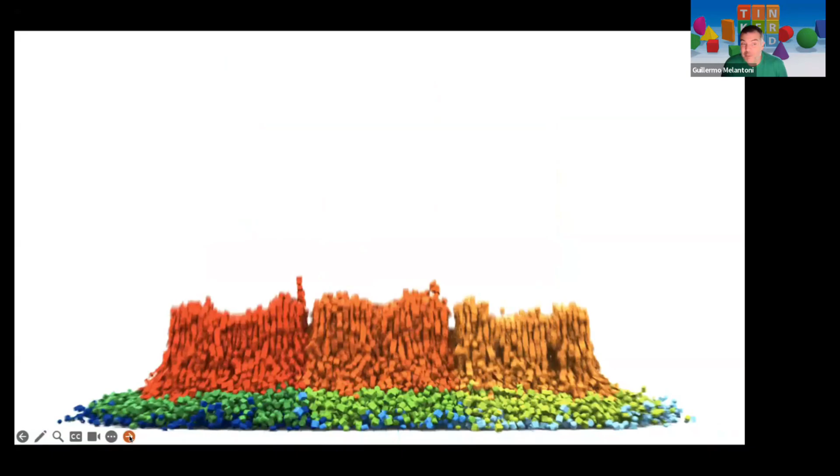Welcome everybody, I've seen people from many countries, so it's great to see a lot of people from all over the world, and actually some people for whom it's really late. For example, somebody from Czech Republic, I tend to count 9 hours over where we have right now here. It's pretty early for them. So yeah, let's go into the next slide.

I just wanted to make sure, because we have people from all over the world, and also experts and maybe people that had just started on Tinkercad, given the fact that we have almost hundreds of thousands of new users every week during back to school. That means that somebody's just started at some point, right? So it's good to make sure that y'all understand sort of how we frame Tinkercad as this great, super fun, but really powerful solution we have for designing, for 3D design, for electronics design, for simulation, that can be used by any ages.

But as Kellyanne was saying, kind of our sweet spot somehow lies in the same place where the distribution landed today here, which is somewhere in elementary school, middle school, beginning of high school, and then usage all over the place into post-secondary and more. That's the spot that I also mark there, which is kind of fun — we're kind of in agreement on where we think we are. The other thing is that at the beginning, you might be using Tinkercad just as a generalist tool for anybody to start getting creative.

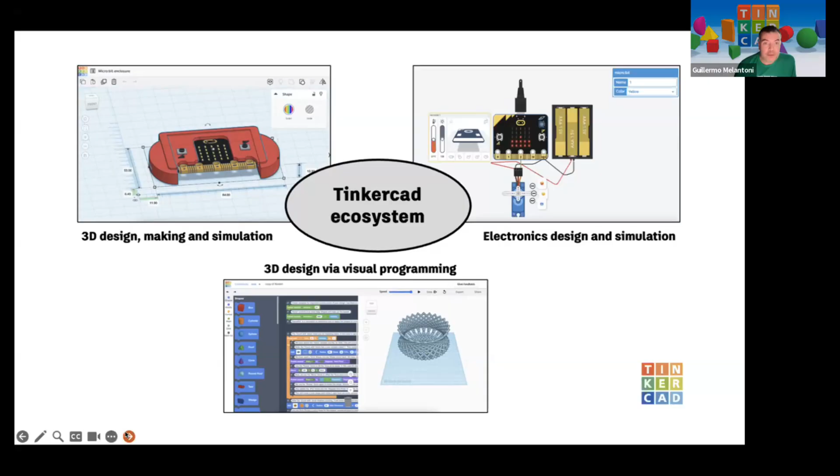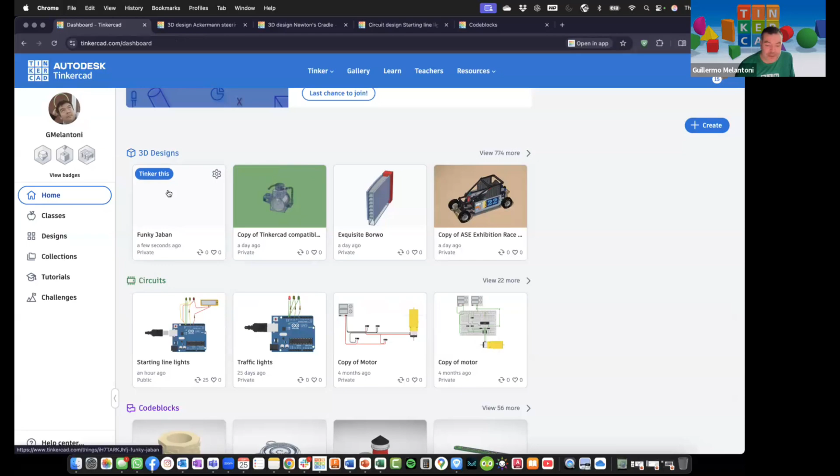Okay, so this is my Tinkercad screen, and before that I'll just go back to my dashboard. So you know, for example, if I start at home, we have our lovely faces up there, and then we have 3D design, circuits, and code blocks on 3 swim lanes, in which you have all the designs you've made. If you have done nothing yet, you will get access to some tutorials to get you started, because nothingness is horrifying, so we want to show you something there. But in this case, I've already created a design, or at least started with a design.

And yeah, you have a bunch of objects on the side, and it's almost natural to see what happens when you drag and drop. So dragging and dropping will get you, in this case, a box on the scene. What can I do with the box? I already have some hints on those little things I have on the box.

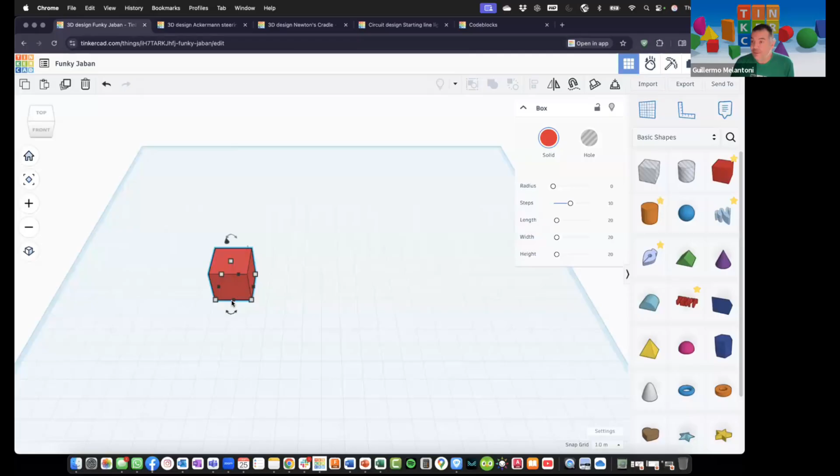Now, if your kids have ever used Google Slides or PowerPoint or done anything with an image, if you go to a top view and make it flat, that looks a lot like a rectangle you put on Google Slides. These controls look a lot like what you would do there, which is push this control to make the thing bigger, and that's a scale. If you press shift, just like on those applications, you get a uniform scale. And if not with shift, it's a non-uniform scale, so you can start getting some language into those heads. Same on the sides, right?

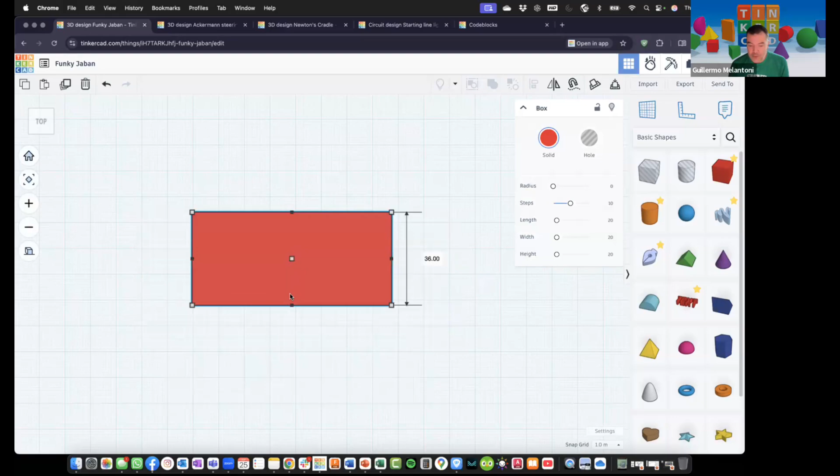You can make things longer with shifts also in both directions. And here's the expert trick that also works in PowerPoint and Google Slides: if you click Option while you do Shift, it's resized from the center. So if you didn't know that for Google Slides and PowerPoint, it's amazing too.

The only thing missing for controlling things is, of course, one that makes things taller or shorter, and one that takes things up and down, because in the lack of 3D on the other spaces there's no need for those, but we try to make them as simple as possible.

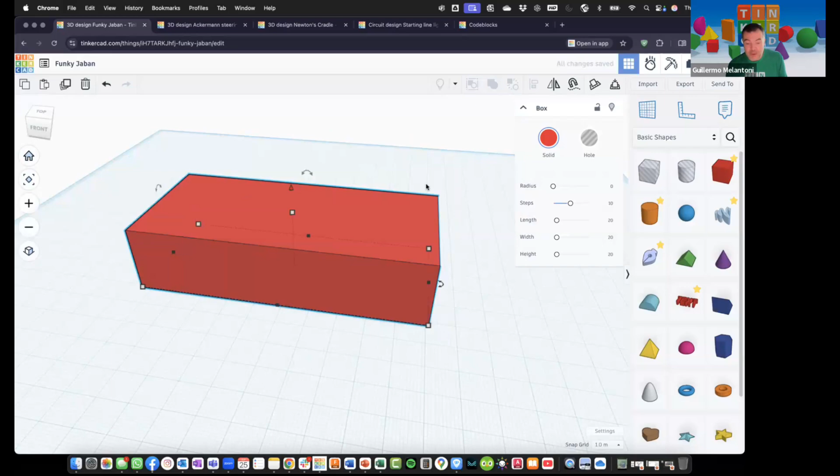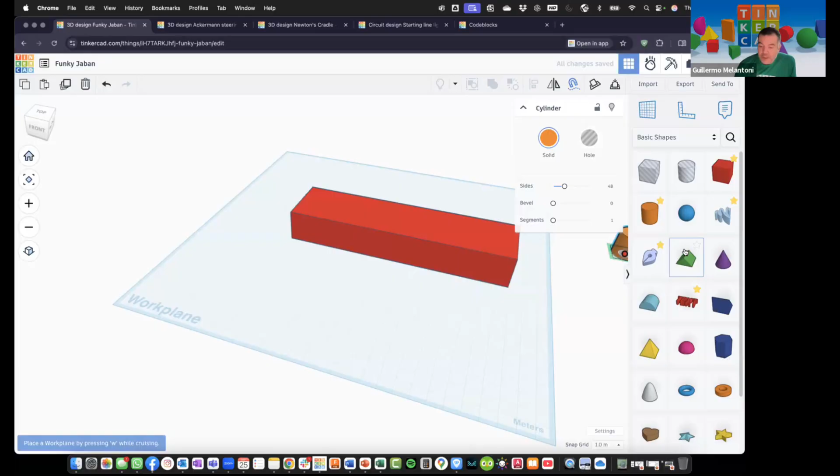Let's say we have this element down here. I'm going to bring a little cylinder, make this a little taller just for a second. One thing we noticed when working with kids is that when you bring something from the side, it will try to follow the faces - we call this cruising.

This is very important because in the past, like probably two years ago, before we had cruising, if somebody just put a shape here, they might think this cylinder is on top of this box. But of course a simple orbit will tell you it's not. It is hard to understand depth for certain ages, so we have to help them understand how to work with those concepts.

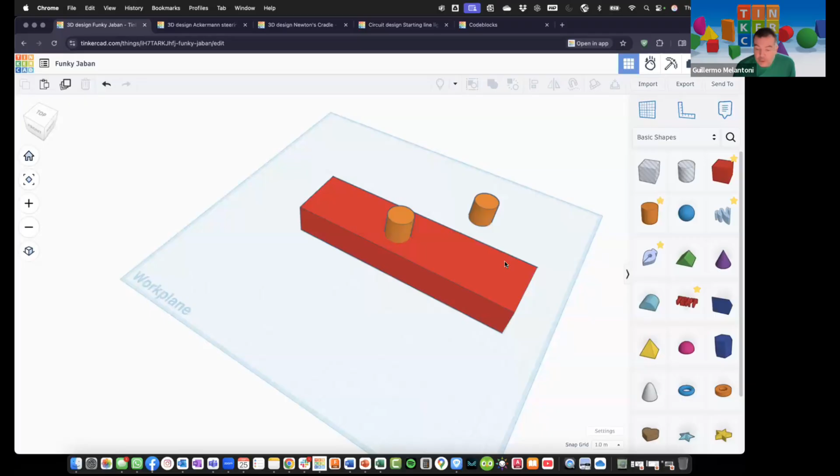So let's keep going. I now have my base with a tall cylinder. I'm just going to copy the cylinder - this is not a Tinkercad lesson, by the way, but I use Option here on a Mac to do it.

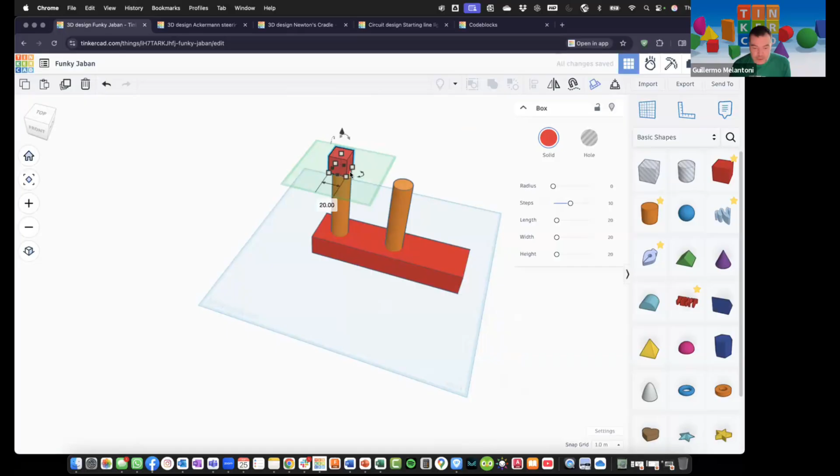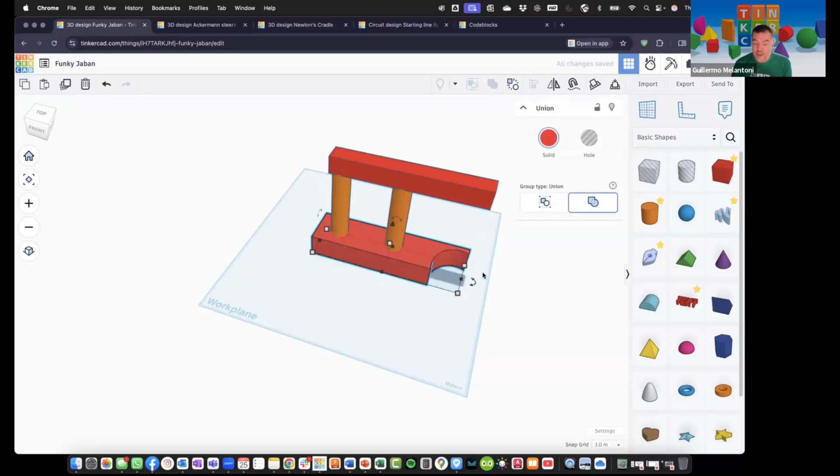Now I'll bring another object to the top, let's see what I can do with this. If I bring another cylinder and make it a little bigger, I don't care that much about how I did it here, but I'm going to make this a hole. If I group - making the choice that the box and cylinder go together and the cylinder is a hole - when I make a group, this thing becomes void right here.

Good to know. Then Christian's going to talk about something new that changes the game a little bit, makes it better and faster, but I'm not going to steal his thunder right now - that's bundles.

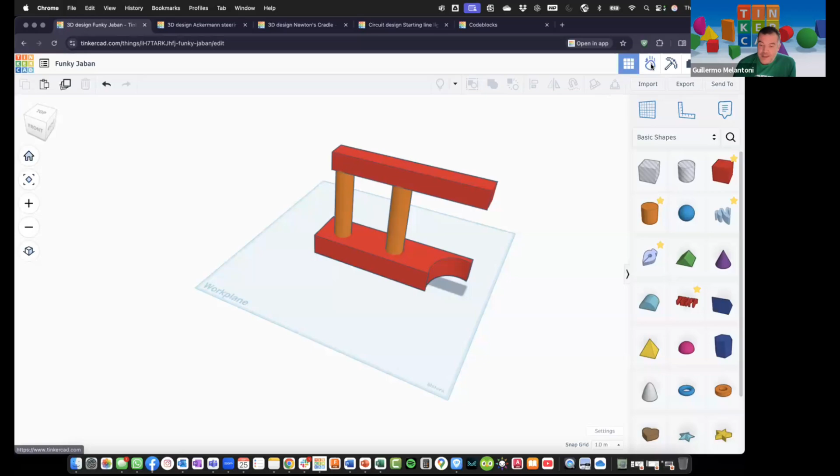So I have this, but now imagine I want to know what happens if I have some gravity on top of this. Funny enough, the button for editing something on Zoom is right on top of the play button, so I need to move this a little bit.

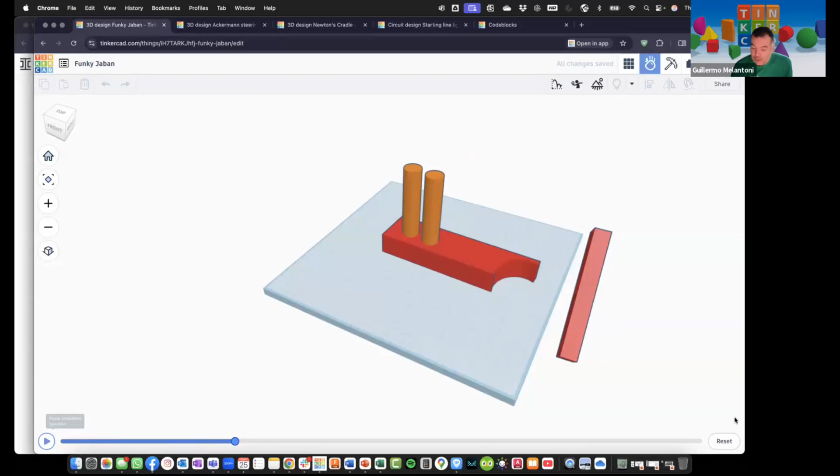And if I hit play, nothing really happens. Why? Because this system is already fairly good in terms of stability. But if I just put this thing here and go back, the whole thing falls down.

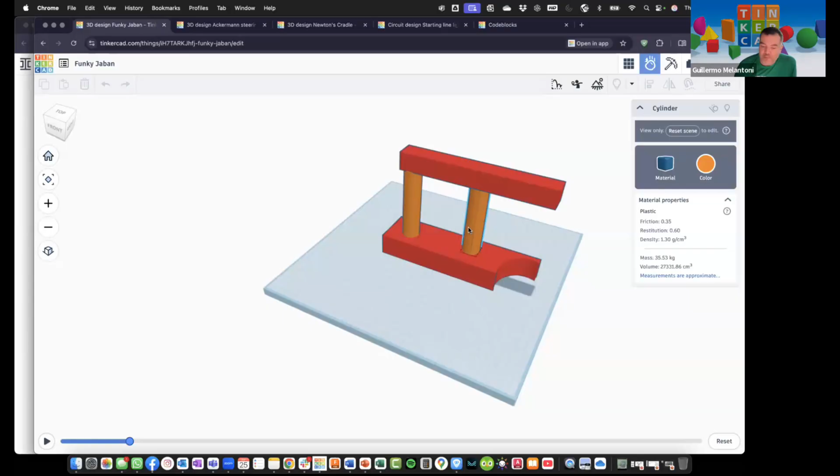First of all, it's really fun for kids to see things falling down - that's the first thing we learned. Second, this is a great teaching moment because you can start letting them understand at which point you need to move this thing for the structure not to fall. Eventually, if your kids are the right age, you might start talking about work - what happens between distance and force, and why this thing is not falling, and how far can it be to not fall. So there's a lot of things you can do there.

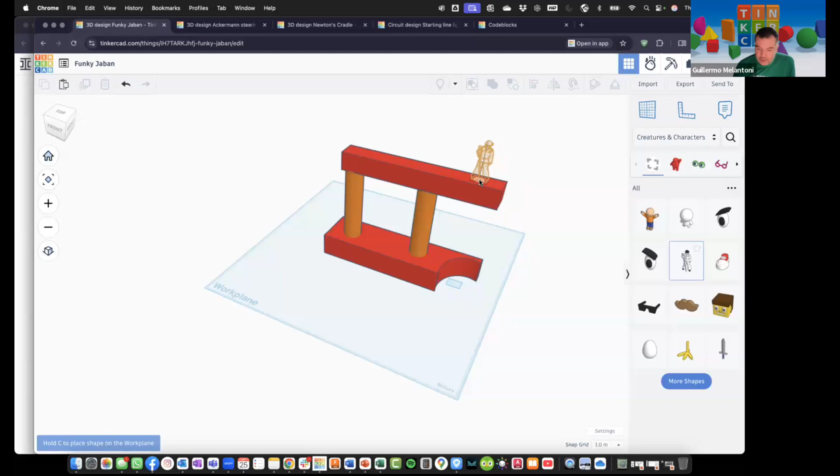But let's make it a little more fun for a second. Beyond basic shapes, we also have other things - we have some creatures here, and my favorite, which is Elvis. So we're gonna put Elvis on top here, and go back to SimLab - the environment I was just using, which is not the one you normally start with, so some of you might not have ever used it. It's kind of wobbly, but still Elvis is there.

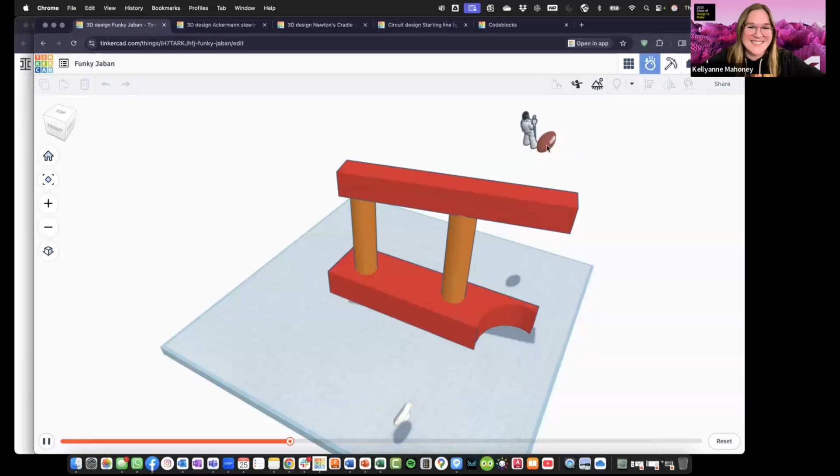You know what, we can just drop Elvis if we are really good at this - oh come on, let me try again. Okay, so Elvis has left the building. So there's a lot of things happening here, and the most important thing is that kids can have a lot of fun and be learning at the same time.

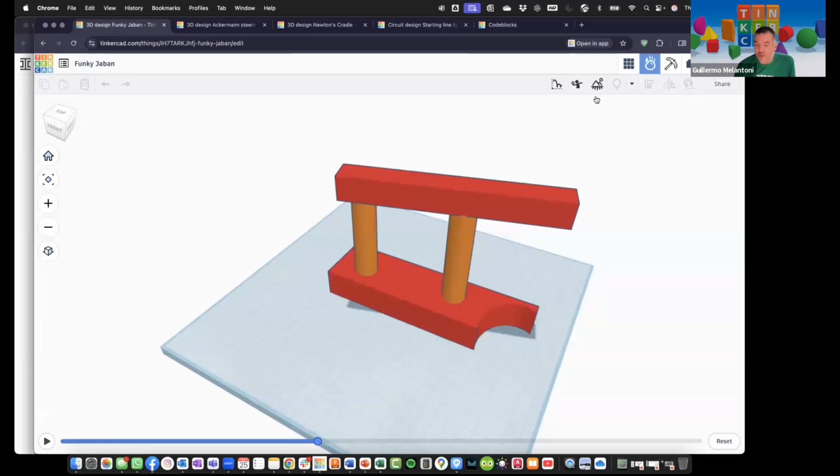And when learning becomes fun, learning is easier, right? Learning doesn't have to be difficult. Here we're talking about deep concepts of physics that if you just tell them, open the physics book to page 349, you lose half of them. Doing something like this could be more interesting, and it could be even more interesting if we start adding gravity and stuff like that.

Guillermo, sorry to interrupt. There's a request that you speak a little louder, some people are having trouble hearing you. Oh, I am never asked to speak louder, I was surprised by that. Use your teacher voice. I was expecting to be told to speak slower. Anyway, is that loud enough? Awesome, great. Hopefully you still understood what I was saying, because it was probably really fun.

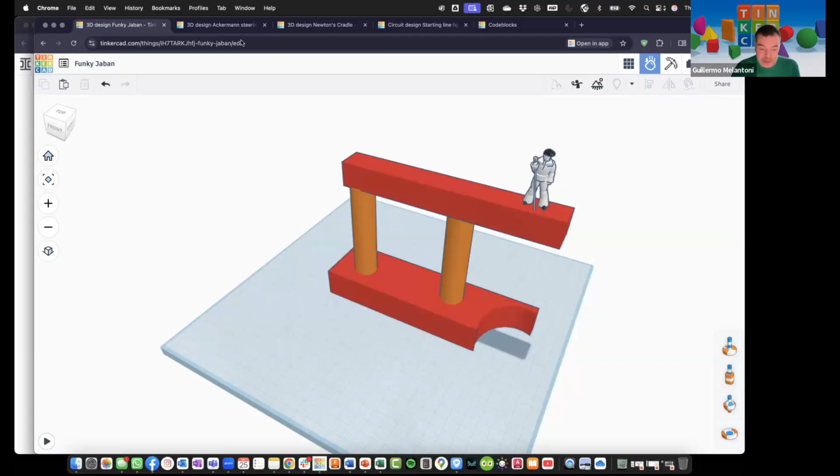Let me keep going into a couple more things I would like to do, because in Tinkercad at any point you can export to OBJs or STLs. OBJs when you have color on the objects, STL if you just want to make a 3D print. Mostly everybody uses STL unless you need color, but we have those options. GLTF serves other purposes. We also have workflows with other tools in Autodesk like Fusion or Forma that we'll cover more in other webinars, mostly the second one, that help you not start from scratch on those applications.

In this particular case, I'm just going to switch to other things you can do on Tinkercad. Again, a little more advanced, just a nod to some of you that might already know Tinkercad pretty well and are probably getting bored if I keep talking about basic things. But for example, this particular example, right?

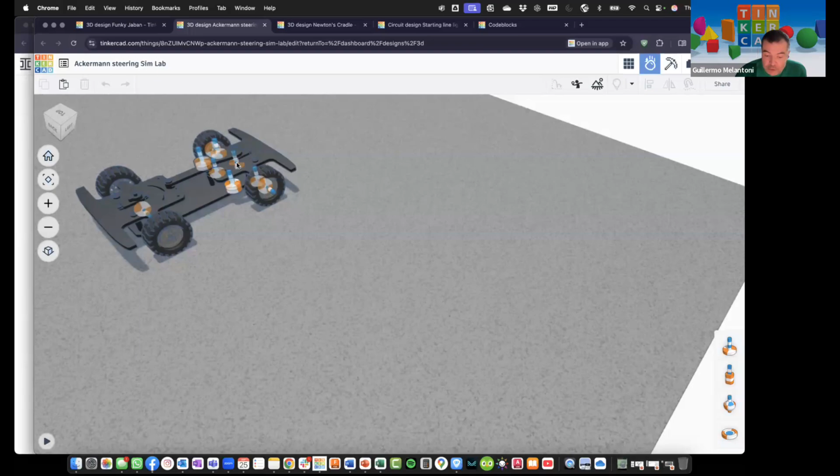So not only on SimLab can we do gravity, but also we have motors. Each of these connectors, which is what we call them, defines a relationship between objects. Could be an axis, could be a slider, could be a pivot. In this particular case, you can define the type of motor and also some of the values, which is going to be starting speed and torque and everything. Again, a lot of things you can start talking about in your classroom.

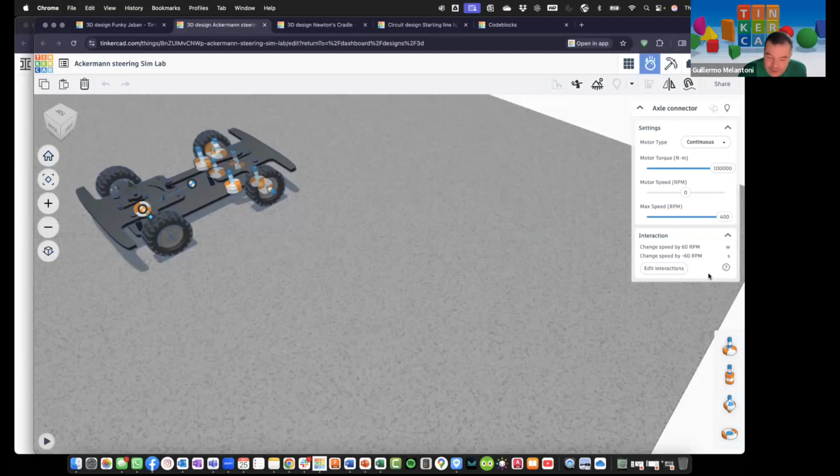It also has interactions. So for example, in this case, A and D will move the wheels because that's what this one is doing, and I'll show you what happens. And then there's another here that will move front and back, so this has rear traction. But when I hit play, not only do I have the object, I can also make it go, just turn. So there you go, right? I just wanted to see if I could, let's make it fall, because there's nothing more interesting than just free fall.

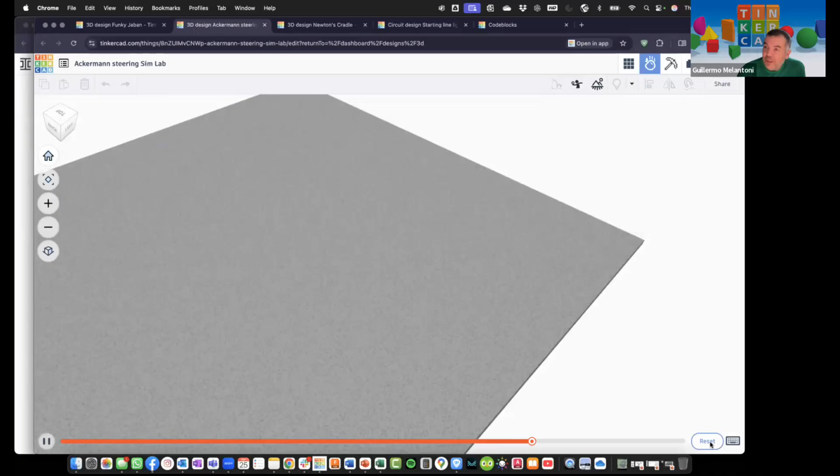There you go. You need to be also young, as your kids, young in mind and immature like them, and laugh about those things. There's a lot to unpack on those things, and we're not going to be talking too much about that today, but definitely there's a lot of really good information on our Tinkercad blog, which is a resource you should be looking at, because we have really good lessons there.

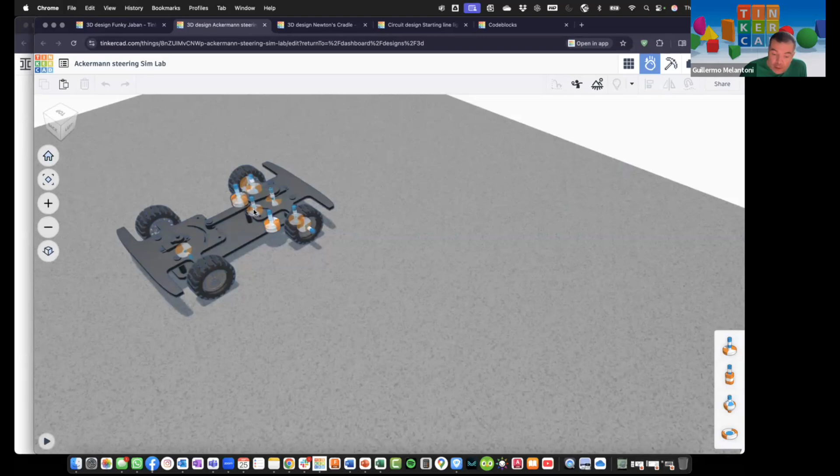So lots of things you can do on Tinkercad that are just way beyond a name tag or some basic things. By the way, doing basic things, if you have beginners, it's amazing.

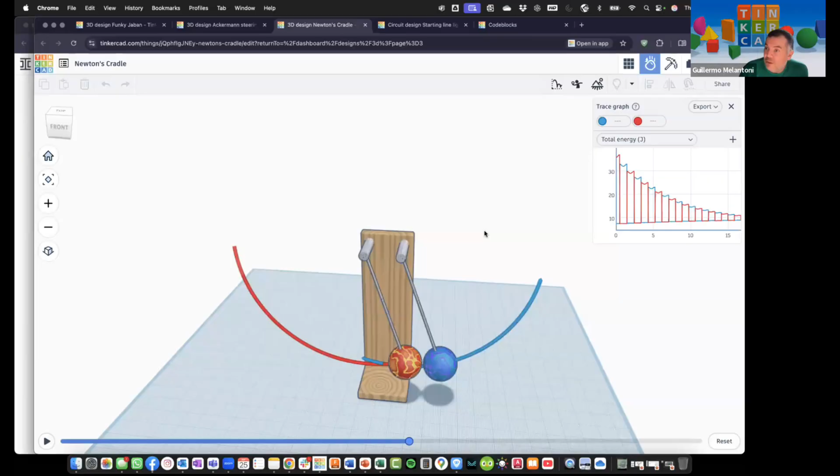But if you start thinking about this, and you have kids doing Rube Goldberg machines and stuff like that, not only can you build them, you can also simulate them and analyze the speed, or a trebuchet - how far can you throw something? I know that's a very common exercise in STEM or STEAM classes. So this could become a really great companion, not just for building something for 3D printing, but to help them design better and understand what they're doing in a much better way.

And that's only with the 3D side of things. But let's stay on 3D, in a different way - this is Codeblocks. If your kids have done any coding with Scratch, for example, they'll understand this interface pretty well, because it's very similar blocks. We've definitely worked on this, and we actually have a webinar together, the third one of the series, with somebody from Scratch, Marion.

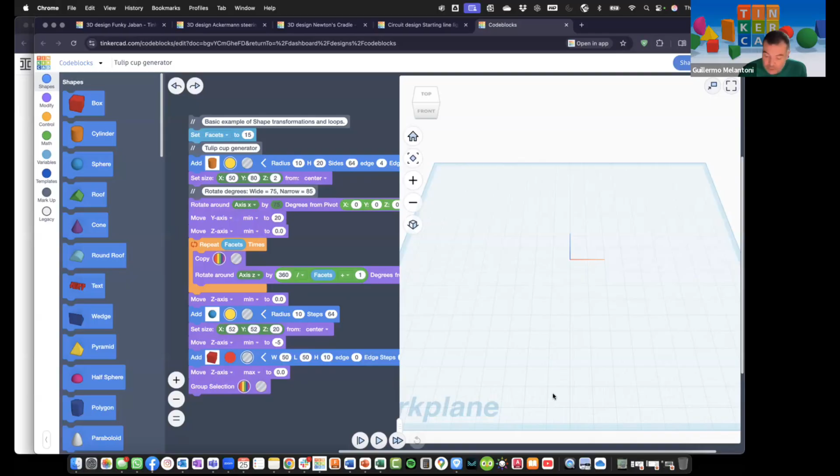In this particular case, we have the same objects we have on the 3D workspace, except that they are put in a way where you can work with code, and by coding with Codeblocks, you can start adding variables. Why is this important? What I'm going to show you here is a very interesting shape, made out of cylinders that are slightly rotated and then rotate against an axis. I can build this on the 3D workspace, not easily, but I can build it.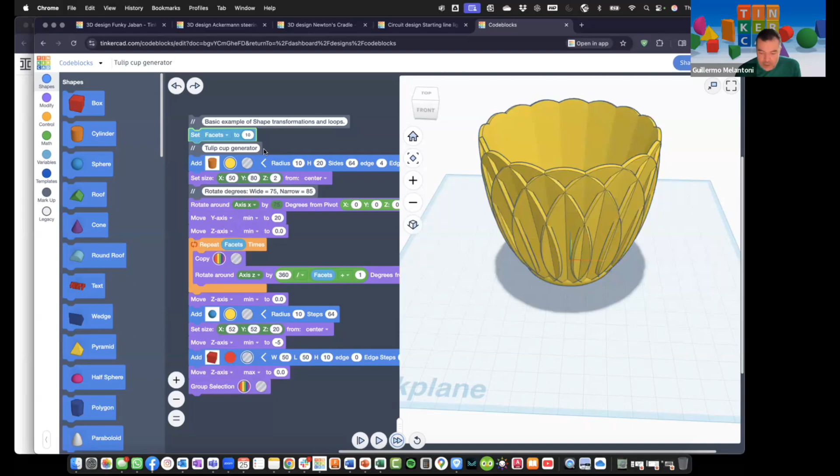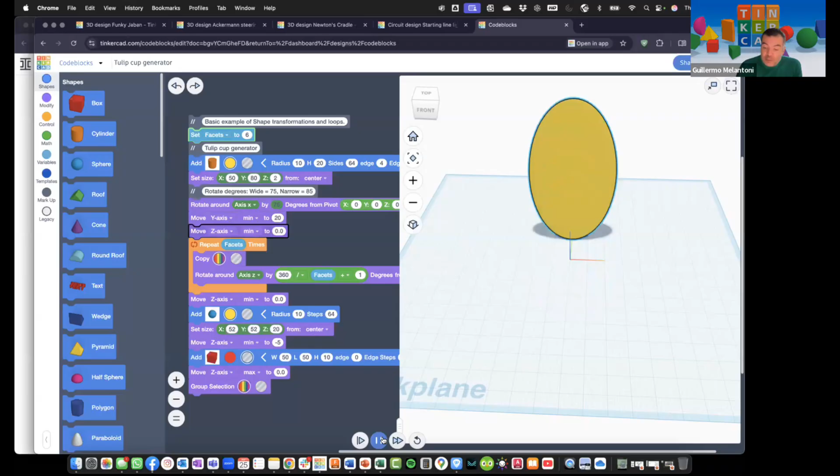But if I need to make a change - say, oh, I don't need 16, I need 10 - I'd have to start again. There's no way to make changes to that and make it work again. But in this case, I can just say, well, maybe I just need 10. Let's see what happens here. So it already changed. What about making it 6? Let's get it started again. So there you go - 6 plus a copy, so that's 7. This is the real power of using variables to do the code, and it shows all the options you can have for making basically what I would call parametric objects.

We normally talk about this a lot in Hour of Code, but Hour of Code should be every day. You should be trying to get your kids to understand not only how to build things, but how to build effectively. Building effectively, in many cases, means having a shape that can have different formats based on what you're doing - for example, more holes, less holes, more faces, stuff like that. Code blocks is perfect for that.

And moving fast now into circuits - again, same concept. You have objects on the right, you just drag them to the canvas. Anybody played Plants vs Zombies? The pea shooter - you were dragging it from the side into the garden too. I mean, it can happen. Kids know how to do these things, right? You don't have to teach them those things.

In this case, I had 3 LEDs, 2 of them with resistors, with resistances, and 1 without. Just a couple of reminders: I put here 2 notes, with intensity being voltage divided by resistance. I don't know if I'm bringing back some nightmares from high school. And current equals - well, it's the same, right - current or intensity is voltage divided by resistance. Why am I saying this? Because if you have a resistance in a circuit, the current is going to be lower, because the resistance is dividing here.

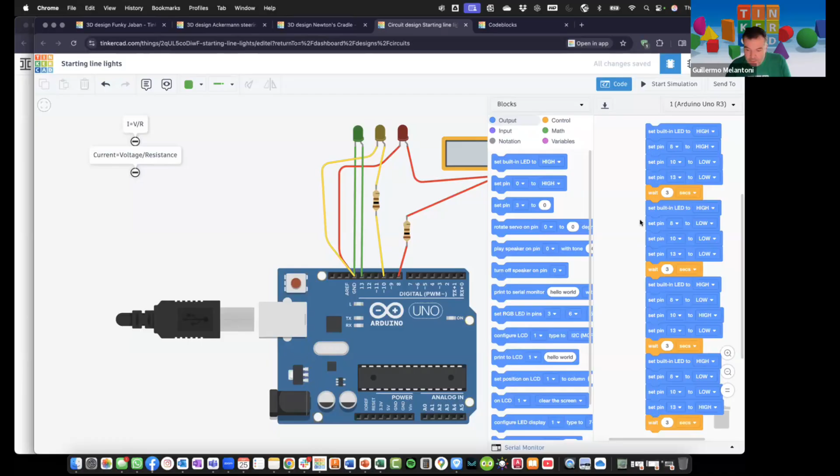It's going to be a little more boring, but I really want to show you something here about this. So if I run the simulation, I also added a voltmeter here.

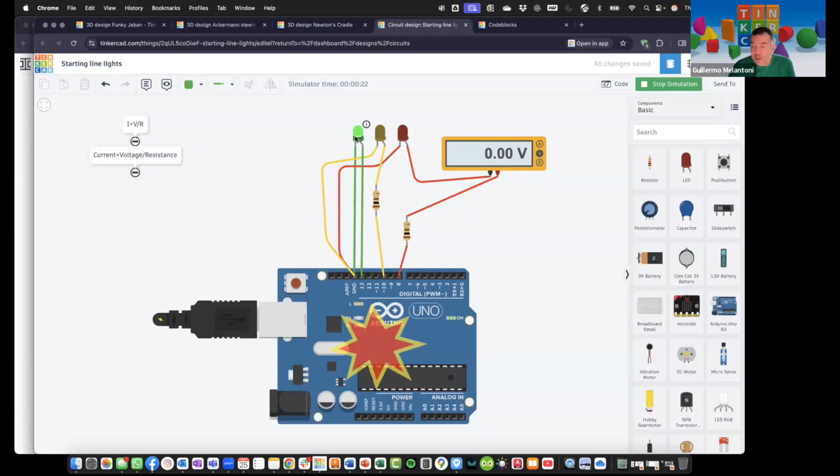For example, 0 volts. Well, the meter is on the red one, but the green one just turned on. What happened on the green one? It has no resistance. It's telling us that the LED is going to either blow up or have a very short life. If we go up here, that's why I said I didn't catch it on time.

So you can check the voltage of something. The yellow one doesn't have anything because it doesn't have it there, but the green one is exploding. Not really exploding, it's just going to not be working for a long time. So what can you do there? I mean, how many LEDs do you want to lose on an experiment, the real ones? You can do a lot of things with circuits that let you do this faster.

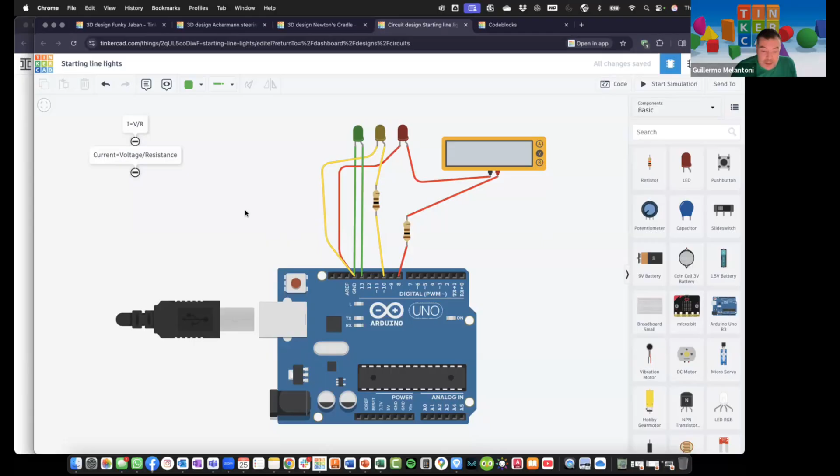So again, design, simulation, coding in a very easy, fun, non-scary environment. It's a great place to start.

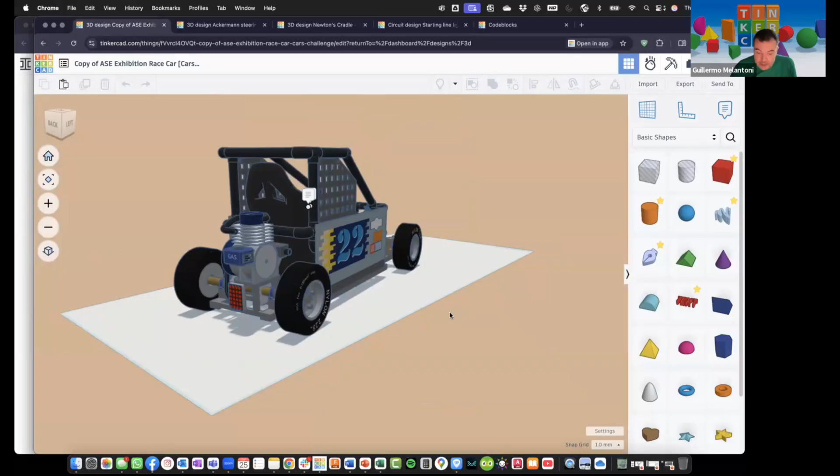But if you start looking at the gallery and things that some people do, I'm going to open one from a high school student that I know well, who created this car, and he actually built the car. He sits in it and drives it. He designed everything on Tinkercad, and now he's actually racing this car. Of course he didn't buy it, he bought the seats, but everything else is designed in Tinkercad, as it should be.

So you can go from a name tag to whatever, from a line-following robot or stuff like that, if you just take the time to see all that we offer in Tinkercad.

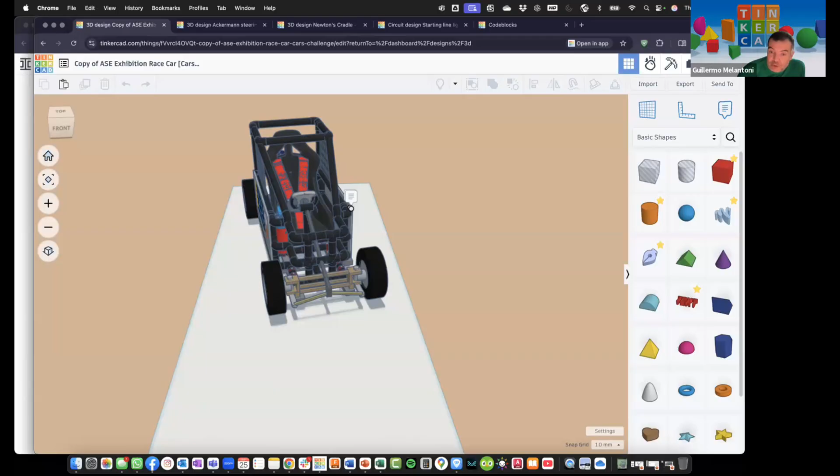Thank you, Guillermo. I don't know if there were questions while we were talking. I was talking fast and not loud, but if there are any questions we can answer now or later, whatever you think, Randy. Oh yeah, there was a question, there's a couple that I thought were good.

There was one: how do you move between the different workspaces, like from code blocks to the circuits editor? I had just opened tabs up there because it was the easiest way, but you go back to your dashboard and choose the workspace and go there from there.

Guillermo, I think the question was, could you move the tulip cup that you made in code blocks into the 3D editor? Oh yeah, so on the top of code blocks you have a way to share, and one of the options is to share to the 3D workspace. At that time, what we share is whatever version of the code block was in the variables at the moment, so we play that sequence and bake that into a model that gets into the 3D space. But stay tuned.

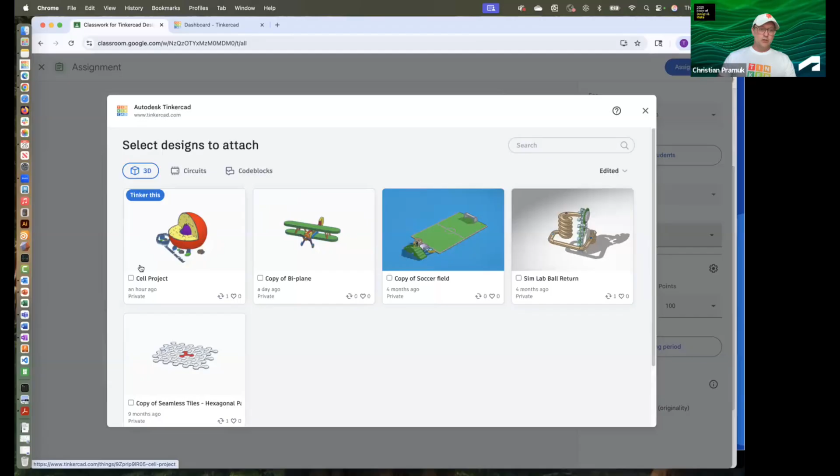As a teacher, I did go and create these earlier, but when I'm creating the assignment, I'm just in Google Classroom. Here's my cell project, and I can select up to 8, but I'm just going to choose this one and click Attach Design down here. Note that I can also try circuits or code blocks, some of those types that Guillermo demoed earlier.

So I'll click Attach Design for that one, and now it's just another attachment here. Of course, as a teacher, I have all of these other resources here in Google Classroom. And of course, I can click Assign. So that's as far as I'm going to take the live demo.

But I do have some slides just to illustrate some of the downstream workflows. So that's the teacher attaching a Tinkercad design and assigning the class. What happens next? You assign the assignment to your students, and your students discover the attachment in Google Classroom in their assignment.

You can see I'm in Google Classroom here, and you can see by this sort of turn-in up here, it's not ready to turn in, it's ready to start tinkering. So the student will take this and start working over in Tinkercad. They just click Start Tinkering from that Google assignment.

Once the student has worked through their assignment, in this case modeled the animal cell and labeled all the organelles like this, they can turn it in. They just click the Turn In button up in their Google Classroom, and the integration is there. Remember, we clicked to allow the integration, so it knows. It's streamlined, letting the student turn in their project for that assignment.

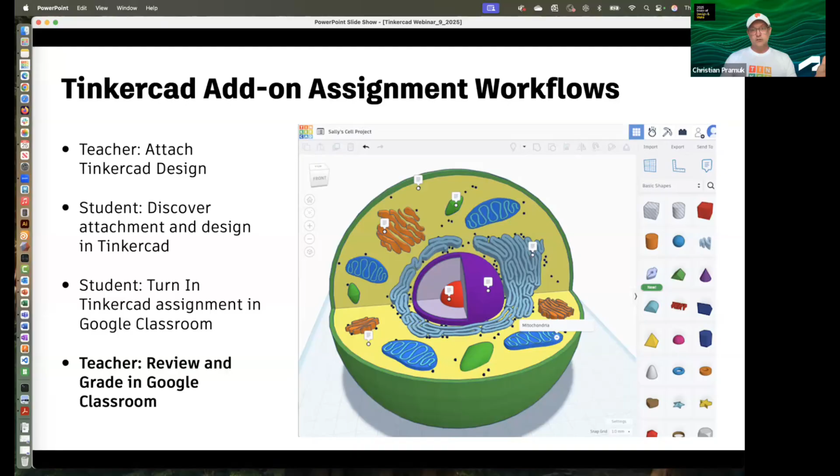Next, once that's turned in, the teacher can review, can open up the student's design to see how they've done. In this case, the teacher is directly looking at a student's submitted work, and they can go back to Google Classroom and do all the things they do, such as grading, all the goodies that Google Classroom gives the teacher for deciding what kind of marks the student got.

Now, I mentioned we have something for you who are not part of Google. So listen up if you're in that other 46%. Tinkercad Classrooms is sort of like a very basic version of what Google Classroom has. We have Tinkercad Classrooms with activities, and it's very basic. So if you don't have Google, you can use Tinkercad Classrooms. These are all based in Tinkercad, of course.

Now, if you're using the Google add-on, the Tinkercad Classrooms are optional. You don't have to use Tinkercad Classrooms if you're using the add-on. One thing I will mention, though, and this is important: if you have kids that are under 13, you probably want to use Tinkercad Classrooms because there's a super convenient way to get your students onboarded. You as the teacher will moderate—it's a requirement, it's a COPPA law to moderate children under 13.

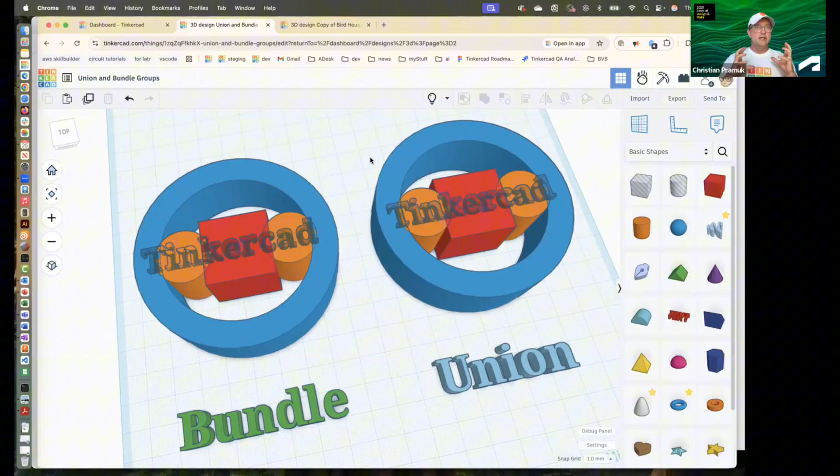Guillermo talked about union groups earlier, where when you group a union group, it combines all of that geometry together and creates entirely new geometry. You might combine a bunch of different basic shapes like a cylinder and a sphere, make one of them a hole, and then you have a completely new shape. You use union for that, and I'm going to demo this.

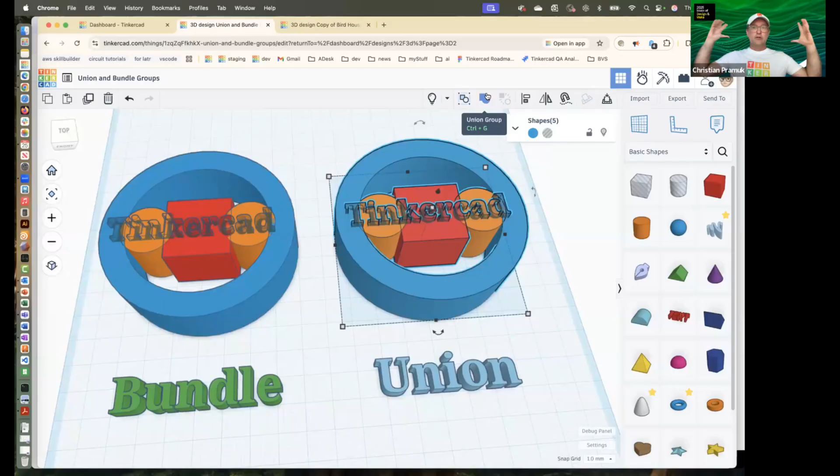I have two cylinders, a box, a text object that says Tinkercad, and this tube object. If I window select and group like Guillermo did earlier, it's going to think about all of those selected shapes and group them. Look what happens, it's thinking, thinking, thinking.

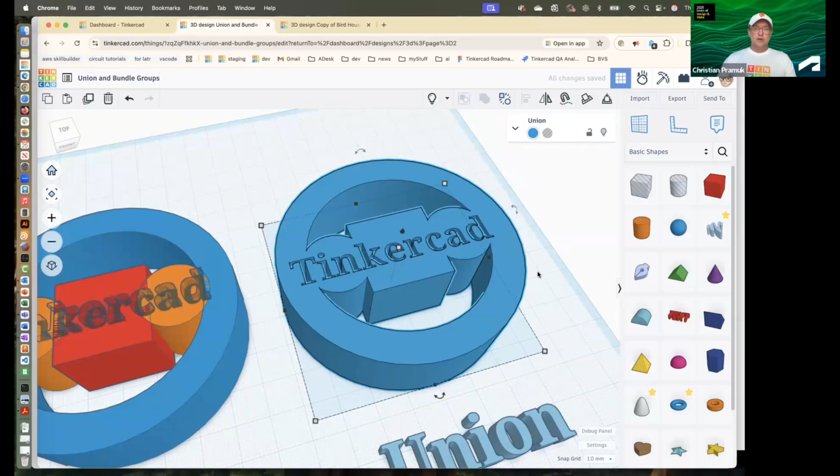That computing takes some time, keep that in mind. But you can see in the end I get one object here. If I select it I can deselect it, and if I select it again, it's one object. Of course I can ungroup it and go back to the components, but this is now its own unique shape made from those basic shapes. That's a union group, and that's this icon here.

Now, what we just introduced is something called a bundle, and a bundle is something that's a little more efficient. You noticed when I did that union group, you saw that red outline and it took some time. That's because it's processing on the cloud so that it can create that geometry.

It doesn't really matter what device you have, we have the cloud to give you that complex geometry. But it still takes time, and as you build your design it can get more and more slow. So we wanted a way you could be efficient in your modeling, and the way we do that is with the bundle.

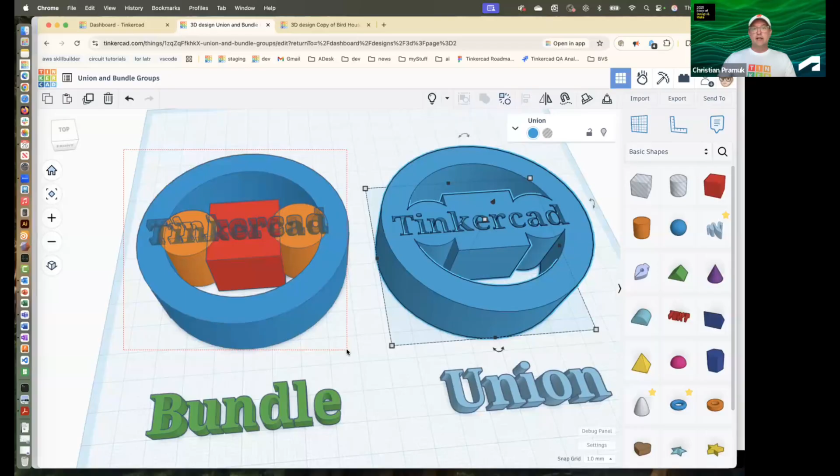Bundles are instantaneous. So when I select this group, I'm not going to select the union group, I'm going to choose bundle. What this does is instantly create a group of objects.

So now when I select this, I can move this around. Let me ungroup that bundle. Before it was a bundle, if I moved this stuff around like this, it falls apart. And if I had a car, I'm breaking my car right now, right?

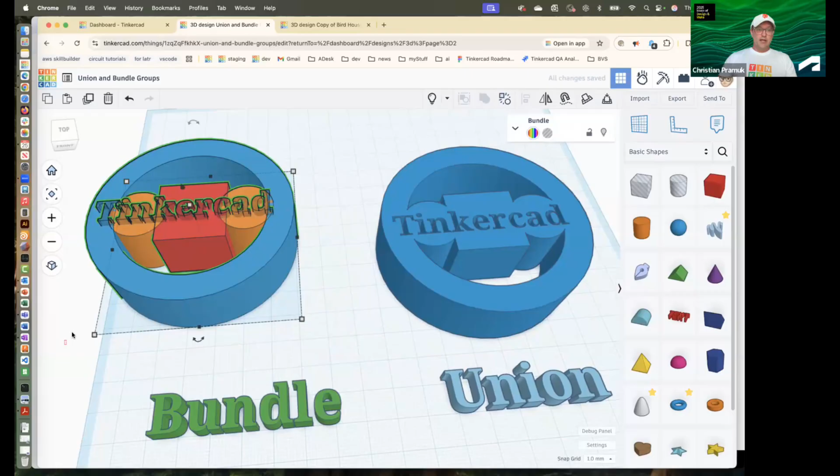So what I want to do is bundle this stuff. I don't want it to move relative to each other, all these shapes. So there's bundle, and now no matter where I select, it's moving. You can see I still have all of my little edges and shapes, and the hole is even still there. It didn't get cut out. So this is a really nice way to keep your scenes for your students, to keep them lightweight.

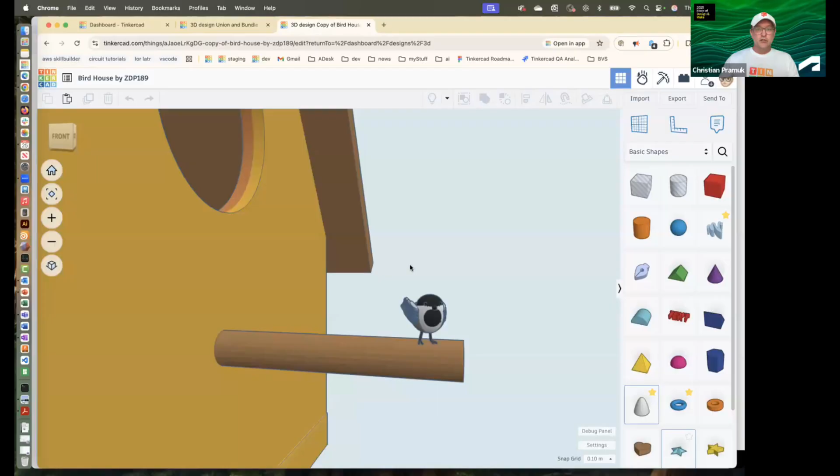Okay, and here I have another example. This is just kind of a real world example. Here's a little bird house, I would say. And this is made by our VIP designer, ZDP189. Thank you, ZDP189. He has some really cool SimLab stuff, if you can check out his stuff in the gallery. But this is a bird.

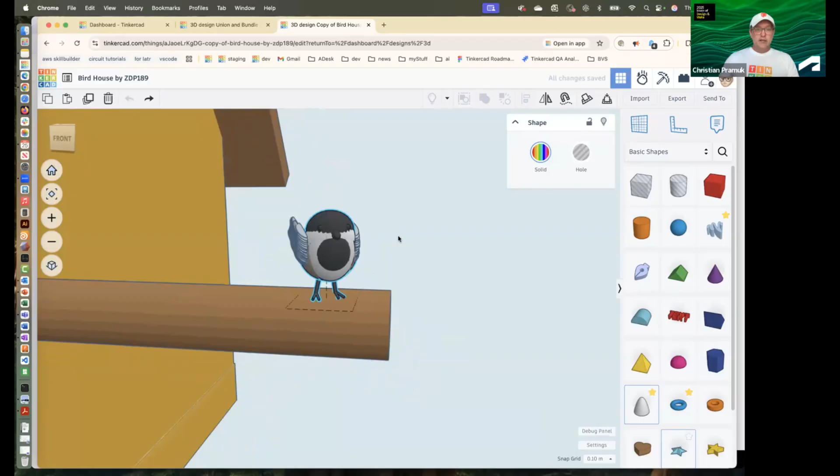Now, if I want to move this bird into his house, I'm going to grab it and I say, whoa, whoa, whoa, what happened? And this is like that car example where you don't want to pull your shapes apart. So what I'm going to do is use a bundle.

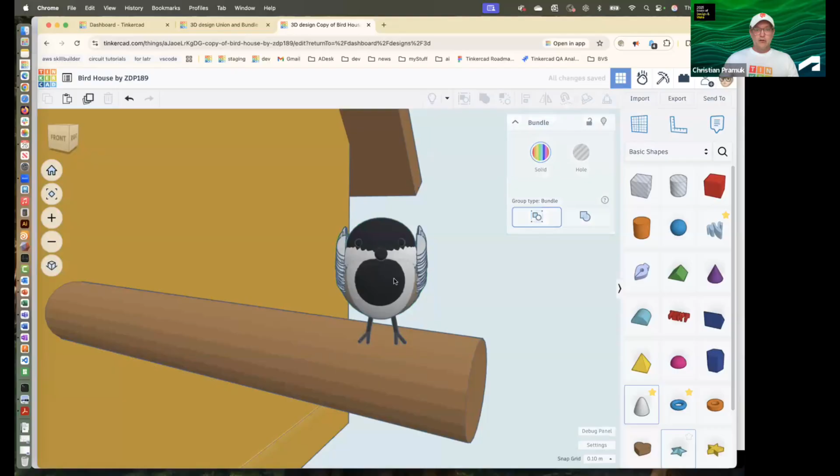This is starting to get a little complex with all these wings. These are basically squashed spheres. So if I were to union that, it might take 10 seconds or so, right? But with the bundle, it's instant. So there's my bundle. Now, when I move this bird around, it's not getting torn apart.

So let me show you some more reasons why I might do this. If I look in my little birdhouse, he's an interior designer, or she, I don't know. But let me hide this first real quick, because I want to be able to look at the layout in here.

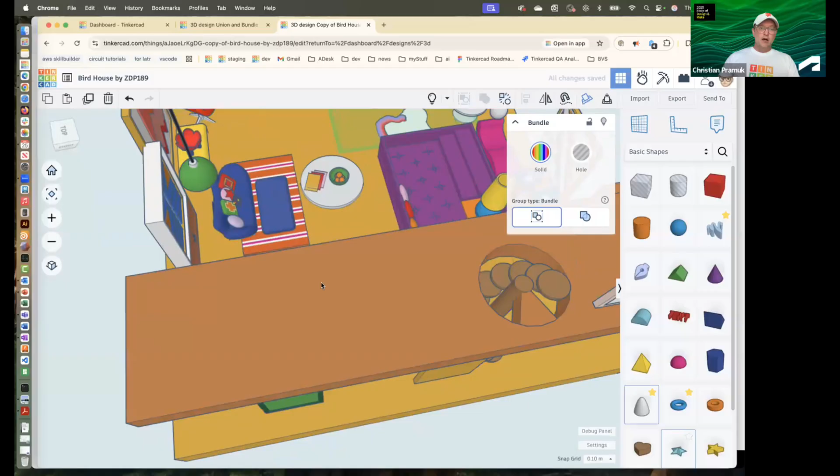And what I can do is I'm going to grab my bird and cruise the bird down into the house. Let me undo that. Cruise down into here. Okay, so the bird's hanging out while we're going to do a little remodeling. The bird wants to watch TV. I don't know what shows the bird is watching, but let's move this couch so that it's facing the TV.

So if I grab this pillow, okay, I need this whole thing to move together. Well, welcome, bundles to the rescue, I should say. So let's do that. I'm going to select these pillows, and the couch and this ottoman and the rug, and I'm going to bundle it. Now, if I were to group this, it would probably take 20 seconds, but I'm going to bundle it and it's instant. And so now I can say, okay, well, he wants to face this way.

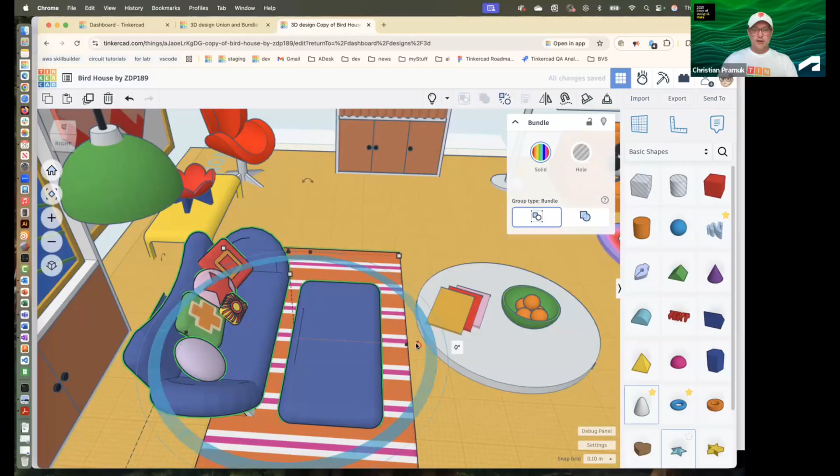I'm going to turn it 90 degrees and go like this, okay? Another cool thing about bundles is that you can bundle bundles. So here I have these oranges. These are a bundle, you can see in the green outline. These notebooks are outlined in green as well. Those are bundles. That's how you tell if it's a bundle, if it's outlined in green.

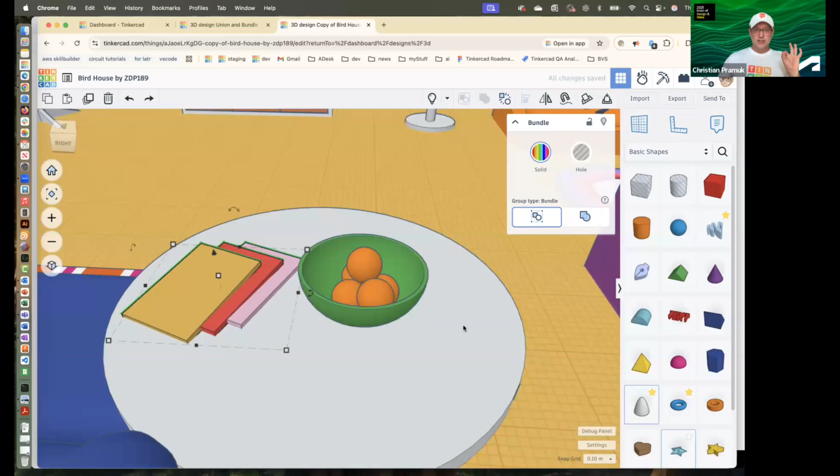And this is a bundle. So what I can do is just say, well, I just want all of these bundles to move together because I like this, I'm going to bundle it. So now I have bundles inside of a bundle, and I can move this around. If I click off of here, I can always just click anywhere, and I'm moving that bundle around.

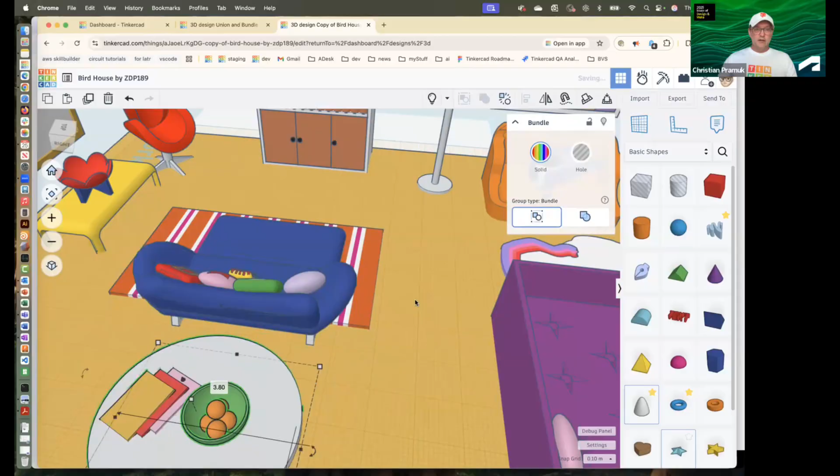So here, let's move this a little closer. Let's move this behind here, and let's move this guy to watch TV. Let's see, I'm going to cruise over here, and then I can rotate him into place, and that's that.

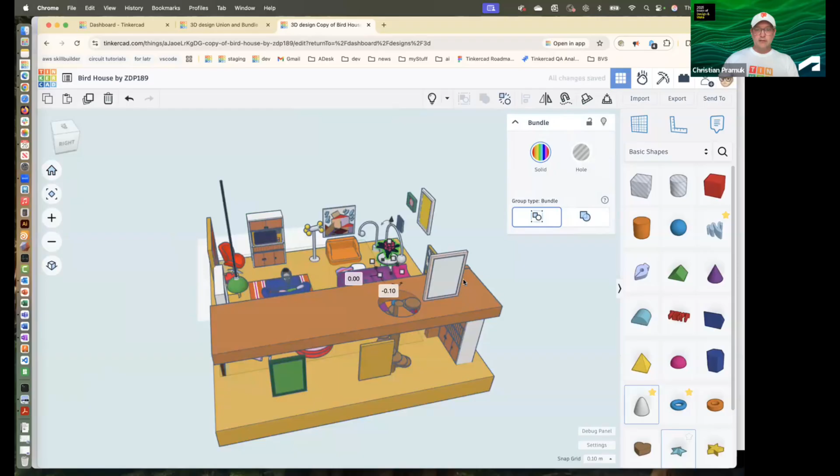Now, to finalize this whole thing, these are all bundles in here. This is a fun little project that ZDP189 created. If I unhide everything, now I have my birdhouse how I want it. I don't want it to change. Now, a common thing that students do is they'll inadvertently move stuff.

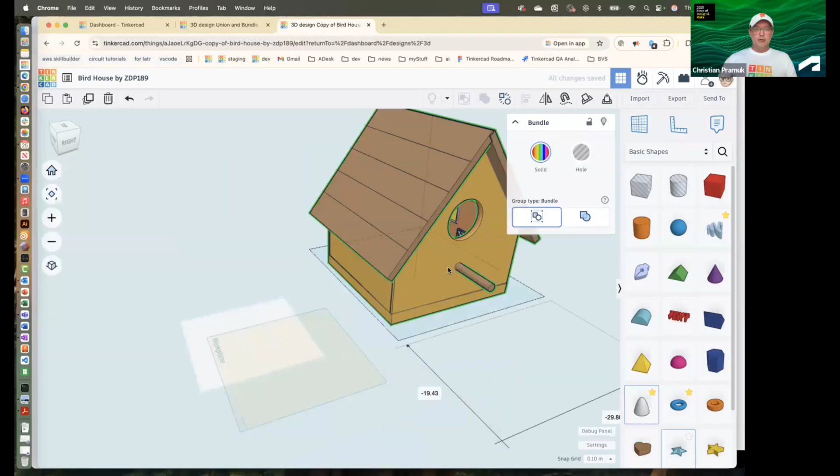So what I might do now is to just make this all a bundle. I'll select everything and say bundle. Okay, now my birdhouse is a bundle. And now when I move this around, everything is moving around how I want it, and our bird is still in there watching TV in the right position. I haven't screwed anything up. I have this big bundle that I've basically made for the whole entire house.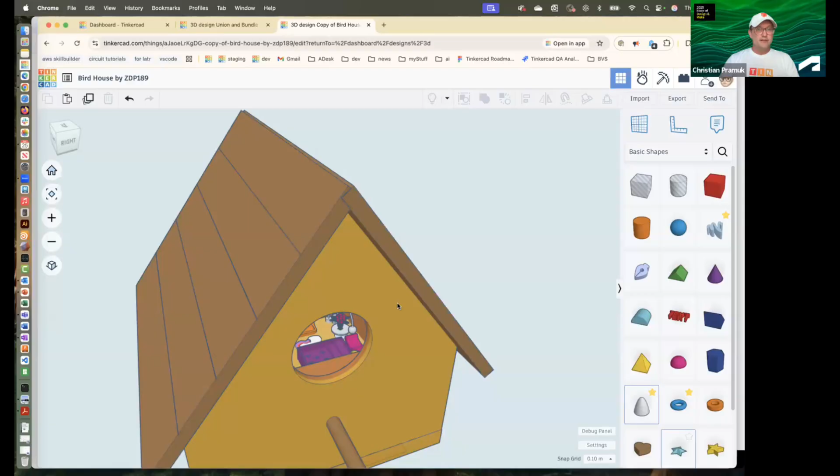And so that's the benefits of bundles. If you were to group this whole thing with a union, you may have to go to lunch or something and come back. So that's my little demo on bundles. Let's move on. Are there any questions?

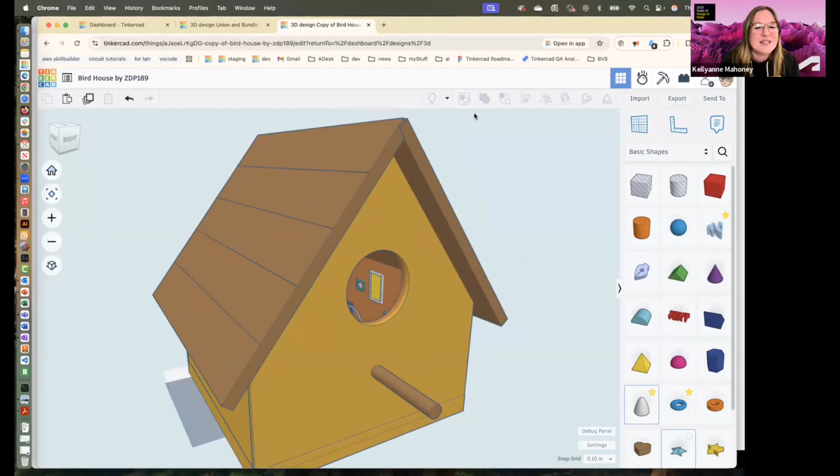I think he's watching the Birdie Bunch. Although he's very good, sophisticated. Oh, maybe it's some type of independent film. I don't know, I have fine taste. The Birdie Bunch is pretty good. Yeah, we can go with that. Fits in the space, I think. Okay.

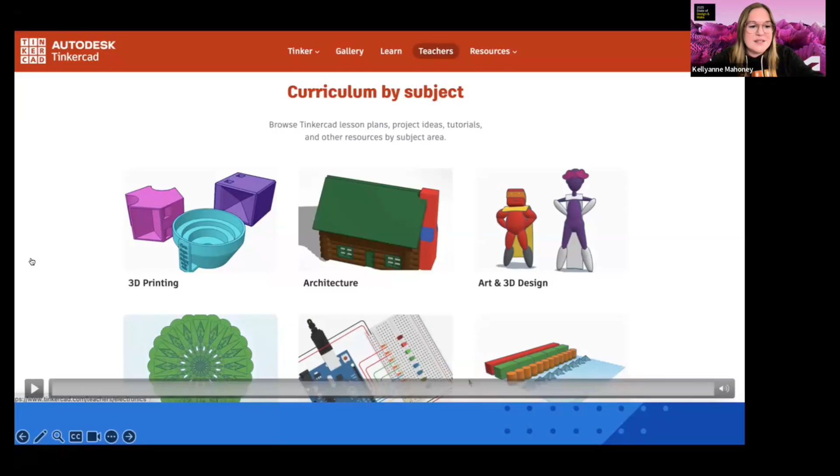So just some resources for inspiring your students. There's been a lot - I know that we were sharing a lot during this webinar, but so much has happened within Tinkercad since the last time that we did a webinar. So in addition to product updates, there's also been other updates around our teacher page. We have a new section that has curriculum curated by subject.

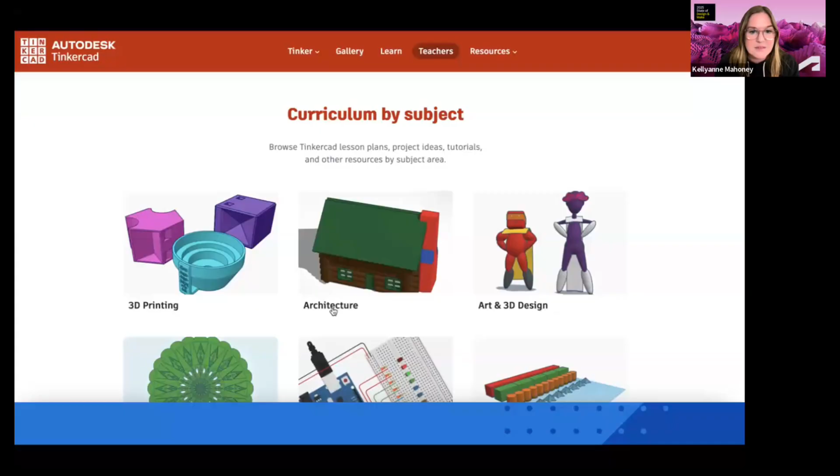And we're going to talk actually during our next webinar about this fun new workflow that we have from Tinkercad into Forma. So just to kind of continue to talk a little bit about those design and make skills badges - those were a way that we were trying to help you find ways to map the skills that your students are learning in Tinkercad with careers that they might want to pursue in the future.

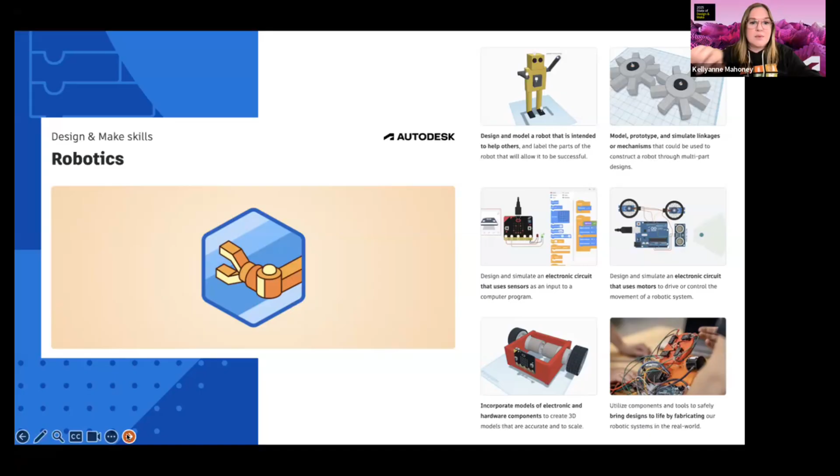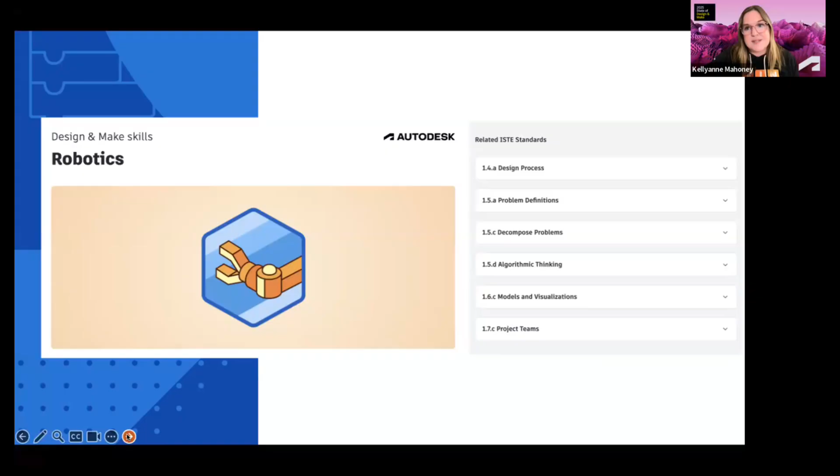So just to show you what these badges look like, how you would issue them - if you have a Tinkercad classroom, you might assign students a robotics project, and it might include some of these sub skills, like model, prototype, and simulate linkages, or design and simulate an electronic circuit. As students develop these skills and demonstrate them in their work, you might issue them a badge. Each badge is also aligned with ISTE standards. So it's just a fun way for you to reward your students and recognize the skills they're learning across different domains.

Speaking of robotics, I recently had a fun adventure at the Boston Autodesk Technology Center, where we invited a group of students who were part of a robotics program, a week-long program. It was really fun because I had to teach myself how to teach students how to design robots. And as a former English teacher and journalism major who did not study STEM, it was interesting to teach myself these skills and learn along with students. That's kind of the subject of this blog post.

Randy's going to put it in the chat. But we did a fun activity inspired by this prompt of what if a familiar robot design could be modified to solve a different problem. What we used as an example was this XRP robot, an open source kit of parts for making a robot that's accessible and easy to either 3D print, or it's affordable to buy the kit as well. This is all in collaboration with First Robotics. And a couple years ago, we actually put this kit of parts as a shapes collection within Tinkercad.

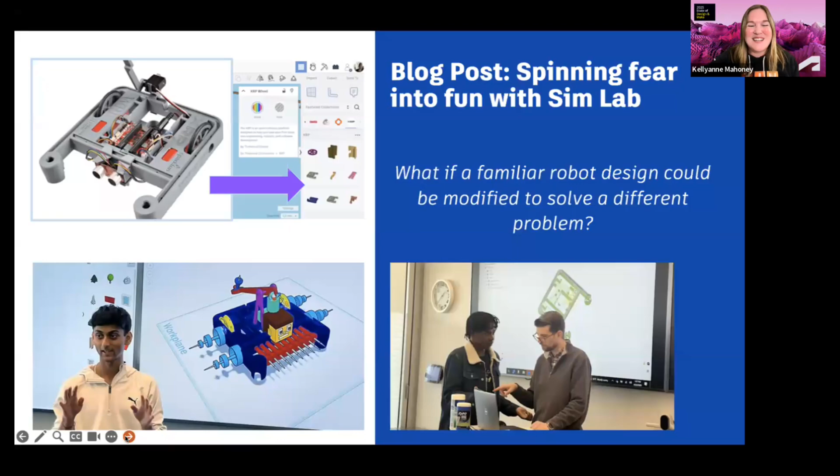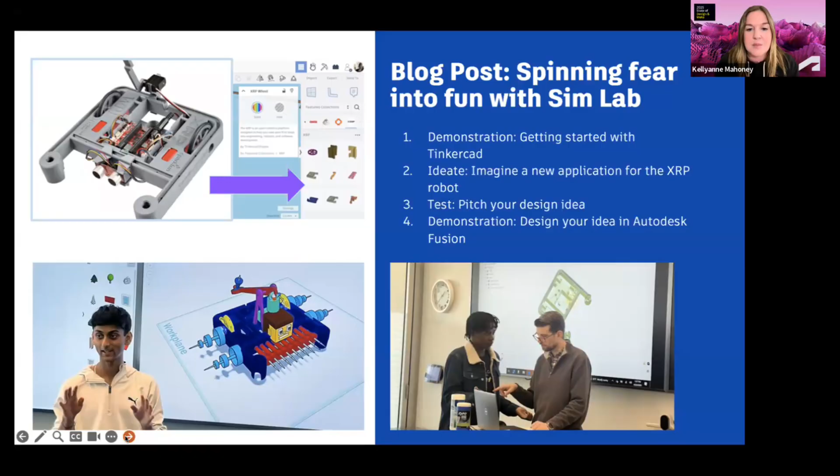As we moved from this fun pitch of an idea in the ideation phase, we then moved into thinking about how you could take this design in Tinkercad, move it into Fusion, and think about the ways you can use Tinkercad as kind of a digital sketchbook for your concept, then move it into Fusion to make a more professional design. So this was the agenda we followed.

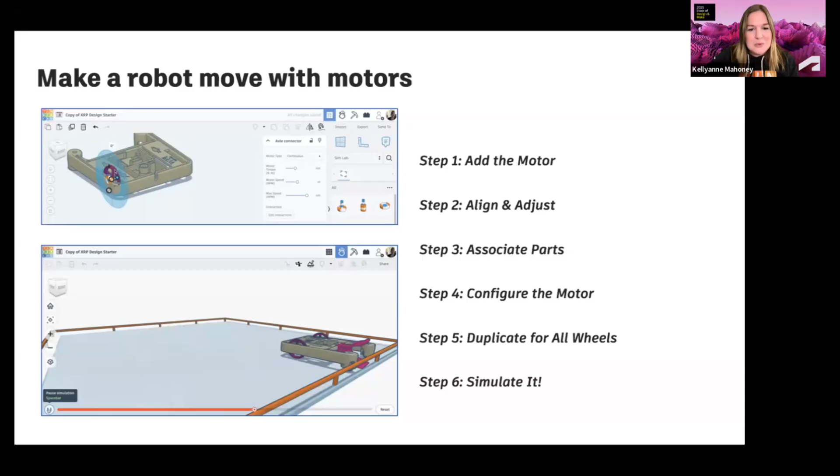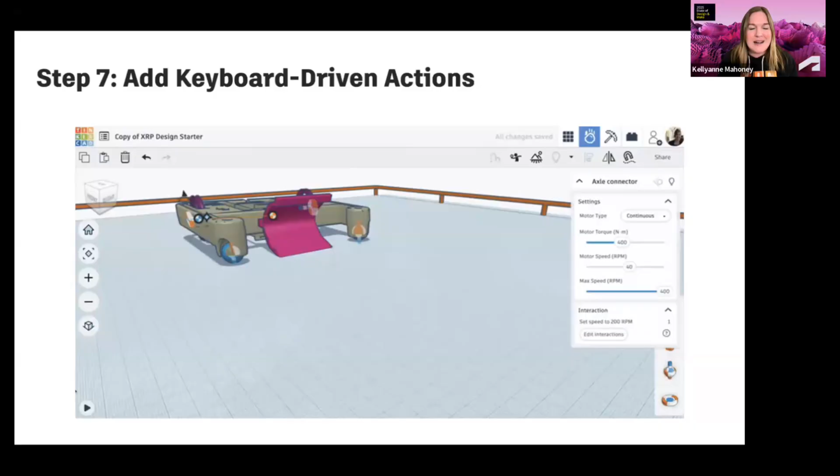I also, within the blog post, have some step-by-step instructions. I documented them as I was figuring out myself how to make a robot move with motors. Guillermo kind of stole my thunder with his really cool SimLab design, but I was proud that I figured out how to make my robot move. I leveled up my skills even during the lesson because students asked, can you hit a key and make the robot move faster? So we figured it out together, and you can see here that we edited the interaction so that when you hit a key, it actually speeds up. I'm ready for Formula One now, I think, with my robot.

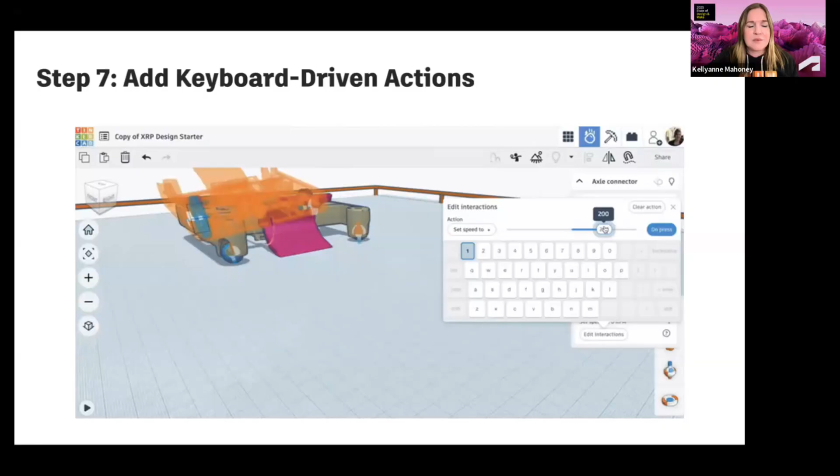Just another new opportunity we announced recently was the Autodesk Tinkercad 3D design certification. It's offered through Certiport - a certification you as an educator could get yourself, and there are all types of reasons why you might want to challenge yourself to get it. It's also a certification you could offer to your students, and these are the types of skills they would need to learn. It's meant to be a way in to getting a certification, accessible, validating the skills they're learning, but not too exclusive that they'd have a hard time getting it.

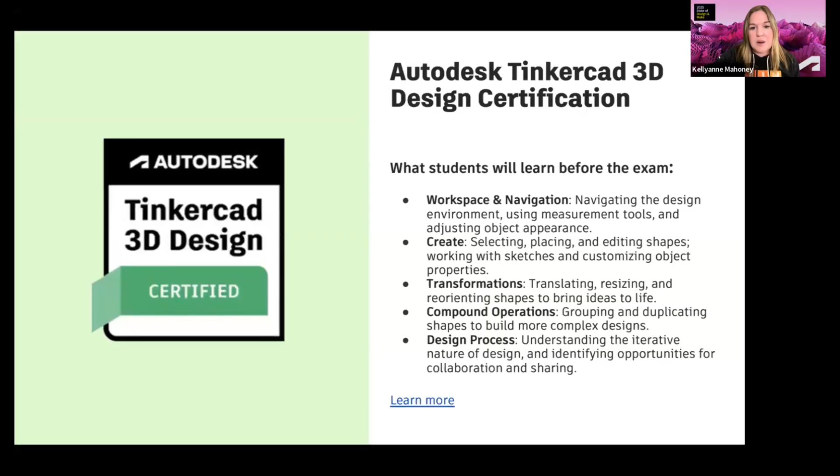Also just wanted to remind you of the Tinkercad challenges. I think that birdhouse design was an entry into an interior design Tinkercad challenge. Nicole, who's with us tonight, does an excellent job coming up with really fun challenges and updating them - we usually have a new one every 2 weeks. These are the ones current right now, and it's a great way for your students to flex their skills, show off their creativity, and be celebrated by the Tinkercad team for their awesome work.

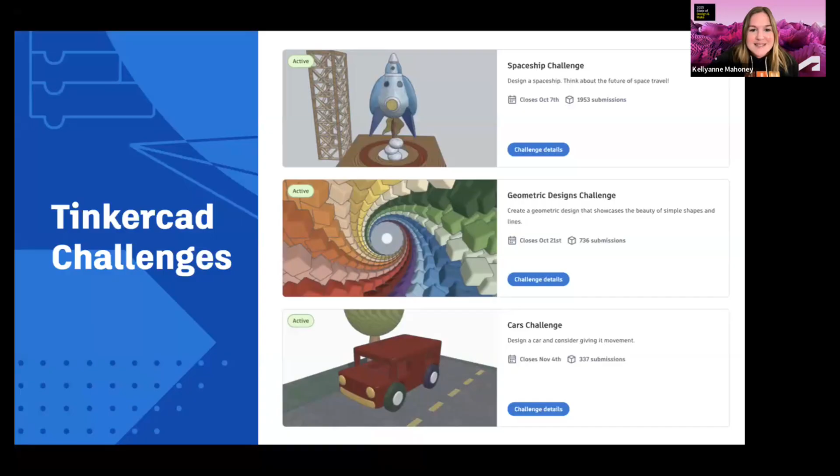We also have student design contests for older students, hosted on Instructables. We currently have 3 running right now: one is an architecture student design contest, another is more in the media and entertainment category called Make It Float, and then there's Make It Spin, which is an engineering student contest. All of these offer cool prizes like gift cards, and each one also has a grand prize of a really cool 3D printer. So check that out, Randy's going to share the link.